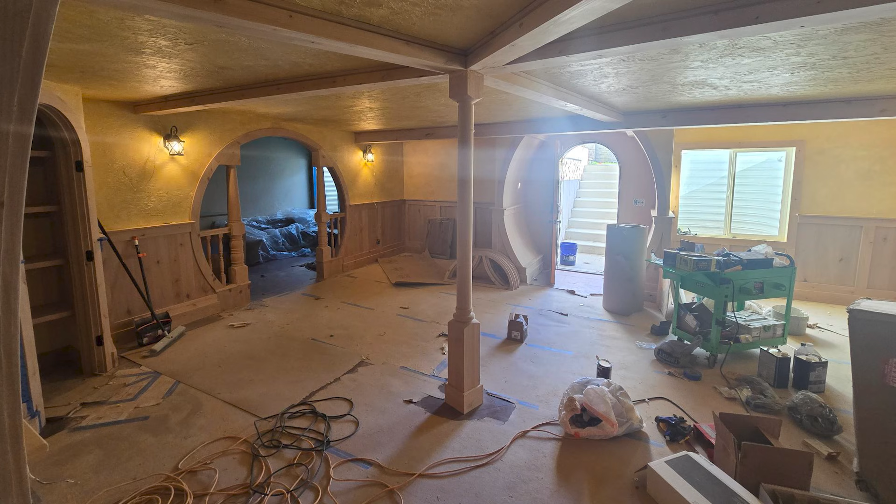Tyler Clarkson, the owner of A Cut Above Construction and Development LLC, is a professional finish carpenter who loves taking on advanced challenges because he sees tons of opportunities. For example, take this current job that he's working on. This is a Lord of the Rings Hobbit-themed Airbnb, and these are becoming more and more popular as investors are trying to create unique experiences for their clients.

A unique theme like this requires a lot of custom components, and Tyler was able to do a majority of the finish work here, including all of the turned columns, newel posts and spindles, as well as the arched and curved moldings. So what I'm going to do today is show you how Tyler would have approached some of these parts on his Legacy CNC system.

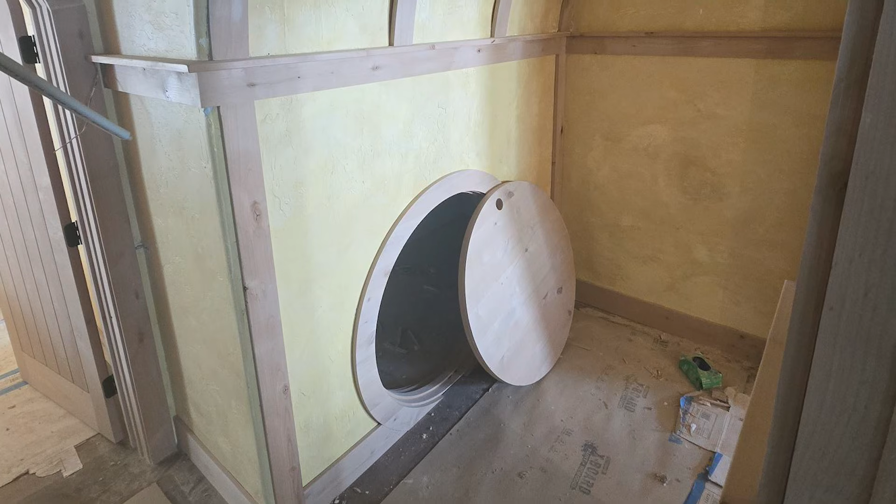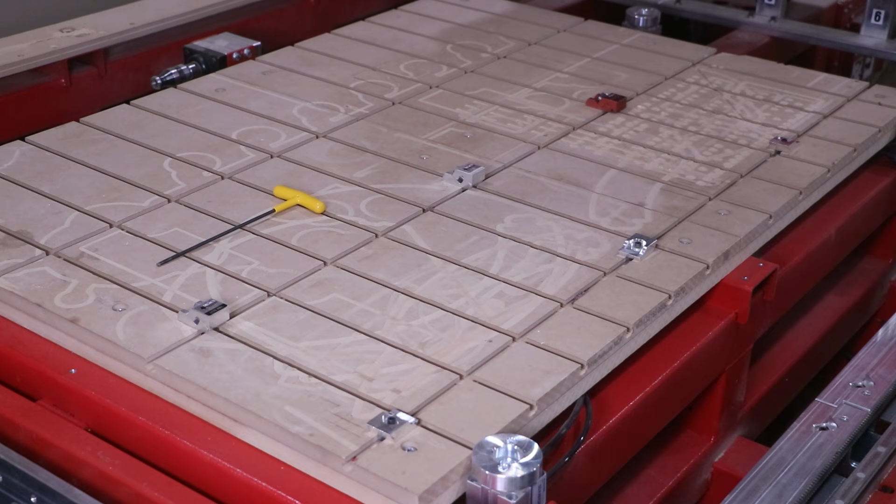Let's start out with the arched molding. Now the molding in this design is more flat and plain. We're going to take it to the next level and have some fun by adding some additional details to a curved shape. Now throughout this video, I'm also going to share some of the decisions I made and why I made them. The first thing I had to decide is how the parts can be mounted to the machine.

Now this seems to be my go-to method for any type of custom hardwood components, using these low pro clamps with the T-slot table. And for this part, I didn't even cut the edges of the blank square because the part is oversized so that I can cut out the entire arched component out of the material. So all I had to do was prep the wood to the right thickness before I took it to the machine.

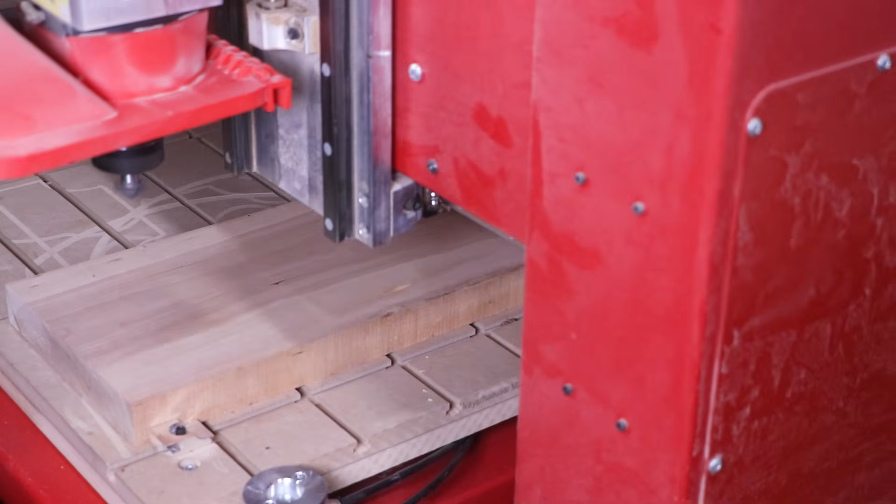Now the one thing I hope you take away from this is the power of router bit profiles. This is the secret to speed and quality on any CNC system, the ability to use the shape of a cutter to your advantage. Here I stacked up 4 different cutter shapes to create this molding profile.

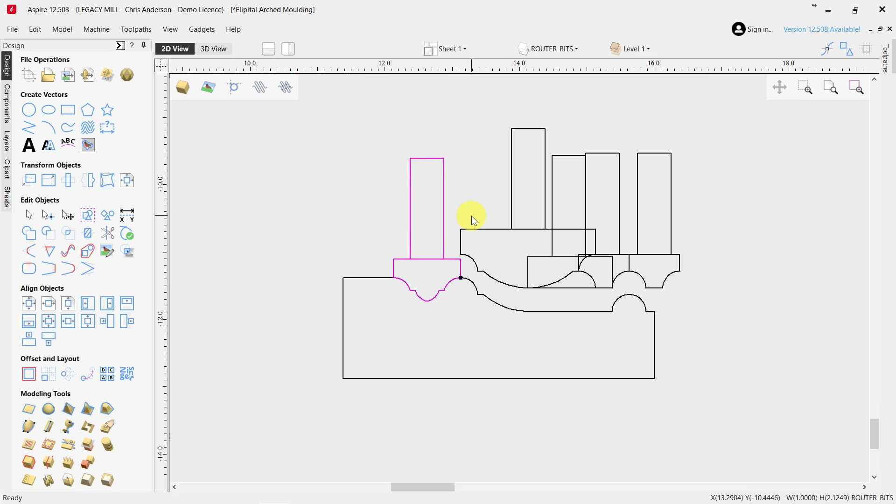The first cutter used is a shallow classic. The second is a cove classic. The third is a flat surfacing cutter. The fourth is a flat roundover cutter. And I did use a fifth, the down spiral 3/8 cutter, to cut out the shape of the part.

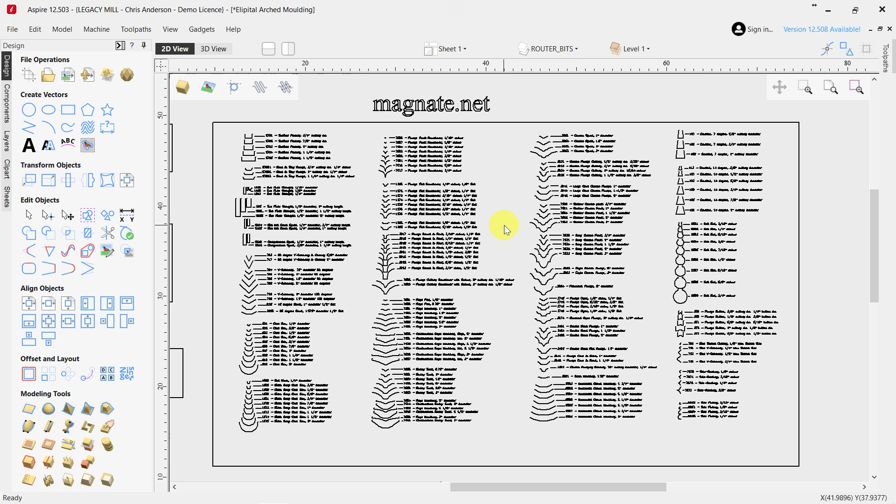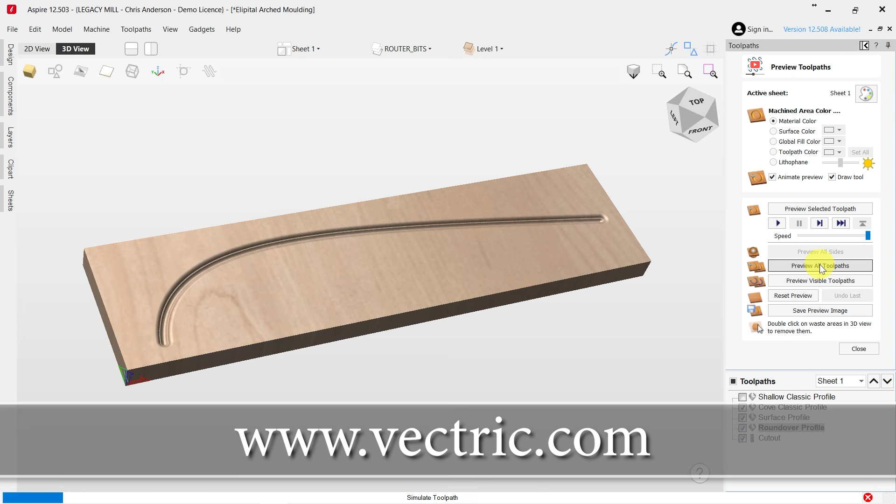To take even more advantage of these cutter shape profiles, we actually use the Vectric software to create an entire tool library with all of these custom profile shapes. Aspire allows you to create any custom profile you wish and add it to the tool library. This technique of being able to apply custom cutter profiles to any vector curve in the CAD/CAM software makes this one of the most powerful features you can do on CNC.

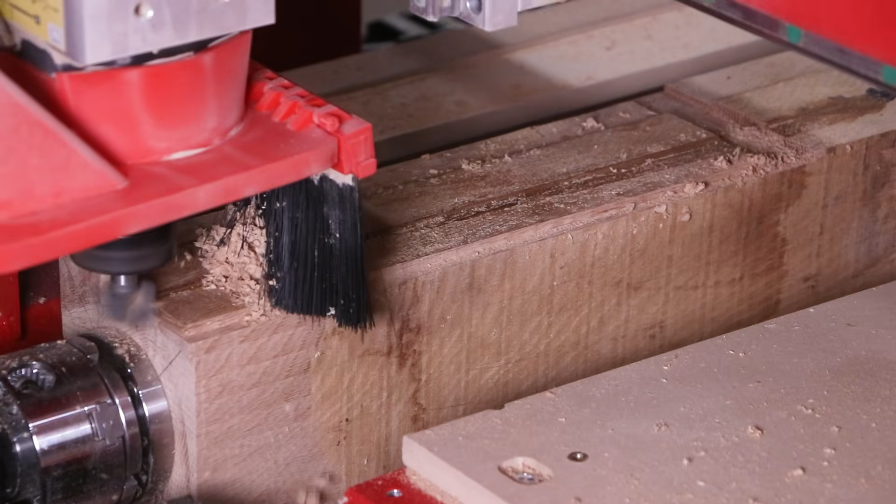But we can still see that this is mounted between centers, where the headstock is a self-centering 4-jaw chuck, but mounted on the end of that blank is a faceplate ring, and that is actually what the 4-jaw chuck is connecting to. On the opposite end, we're supporting the blank with our live center tailstock. Now to make this easier to work with, I oversized this blank by 1/4 inch in the diameter. This makes it so I don't have to get a perfectly sized blank perfectly centered in the machine. Again, there's too much room for human error when you're applying screws and holes by hand into the end of your blank. So by oversizing it, I'm going to use the machine to square it to the exact diameter that I need it to be.

The overall design for this newel post that we're creating has two different methods or techniques that we're going to be using. And that is indexing techniques, where the stock is going to be held still like shown here, and the cutter is going to be machining whatever detail to that face, and then it rotates and indexes to the next face so it can repeat or do another detail. The other technique is turning, where the stock will continually rotate as the cutter is approaching the material so that the design is applied to the entire circumference of the part.

I found it's easier to always do the indexing techniques first before the turning techniques, because you can't guarantee that when you're done with the turning technique that the flat section of your multi-sided part is perfectly square to the machine. So that's why we start with the blank squared to the machine and then perform the indexing procedures first. This ensures everything lines up in the end.

Now the first two cutters are going to be used to rough the entire material down to shape. And so the first is machining it square with this 1¼ inch surfacing cutter. Now we get this cutter from magnate.net, and it's unique because the bottom face of the carbide is completely flat and doesn't have a standard 1 degree rake to it. This flat surface makes it so it leaves less tool marks, and we can apply the same cutter to not just flat surfaces, but also cylinder round surfaces. This technique of surfacing your part is a very common technique that you're going to use all over the place on CNC, whether you're surfacing a tabletop on your horizontal work surface, or if it's a multi-sided piece in a turning center like this.

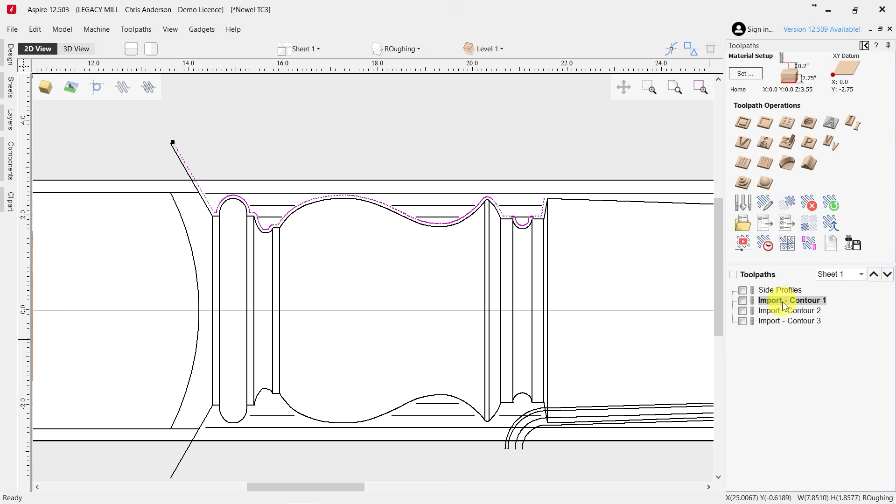Originally, we would have to create a 3D model and approach this with a different cutting technique, but now we're able to produce a 2D vector of the shape we want to produce in our Vectric software, export the G-code, and import that G-code into CCAM Pro. There we have a toolpath that will convert the G-code from a flat 2D profile to a vertical profile while adding the rotation throughout that entire profile movement.

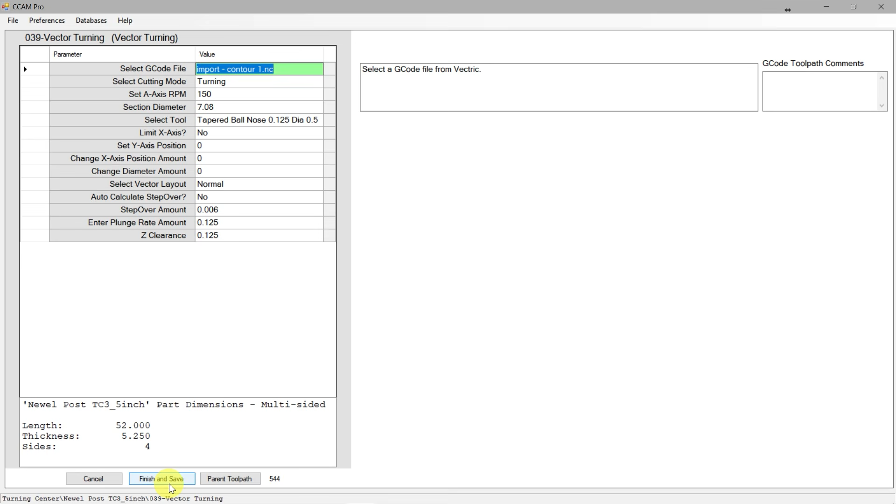Once you have the G-code of your 2D profile that you want to produce, we can do that conversion in a matter of seconds in CCAM Pro. This importing toolpath is also combined with all the indexing and turning toolpaths that Conversational Cam has produced. This foundational technique of contour turning was one of the main reasons why Tyler Clarkson found so many opportunities.

After an hour and a half of training and tutorials, Tyler was able to receive a photograph of the spindle his clients needed, and he's able to trace and produce the contouring process to complete the job. In his first 3 weeks of programming, he produced over $17,000 in revenue in spindles, balusters, newel posts, and columns. A big shout out and thank you to Tyler Clarkson for sharing with us your work and inspiring us to make this type of video.